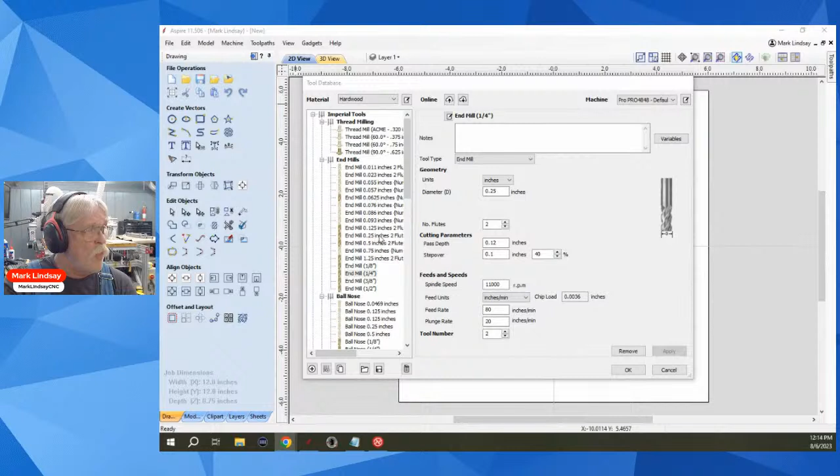Now this 1/4 inch end mill is set at tool number 2 for some reason, and I don't remember why I have this set at tool number 2. But if I come up here to this 0.25 inch 2-flute end mill, it's tool number 1. They're both 1/4 inch end mills, but the geometry is either slightly different or I have a feed rate set different, so I want to make that distinction. I want one to be able to plunge deeper than the other.

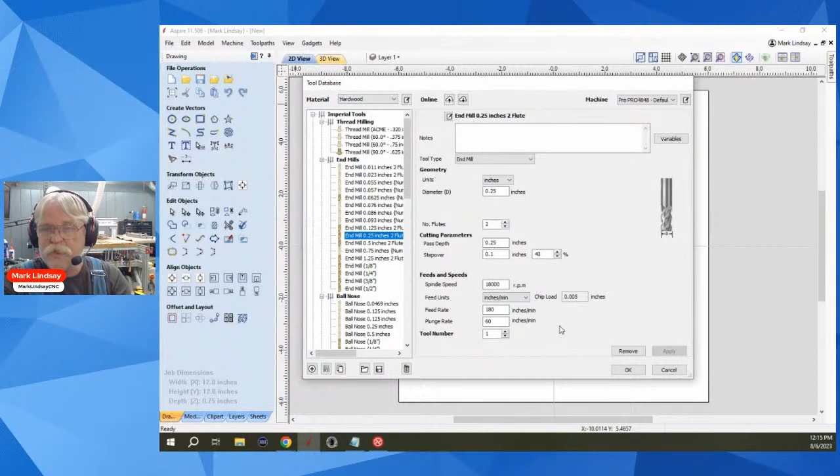So I have changed the tool number, letting me know that it's time for a tool change. I use this in situations where I want to use both a down cut and an up cut within G-Code. I will put a tool change in there on purpose.

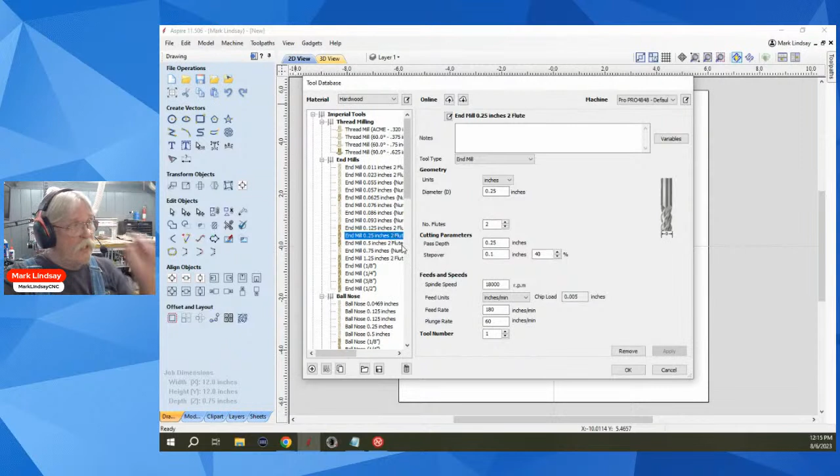Now if you look at, let's see here, I've got this 1/4" end mill that is tool number 1. I come up here to this 1/4" ball nose. No, not that one, this one. Okay, that one's tool number 6. That one works out just fine.

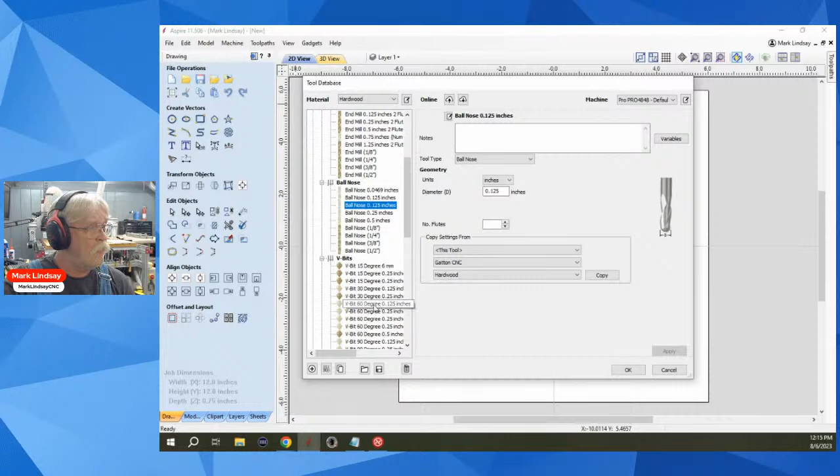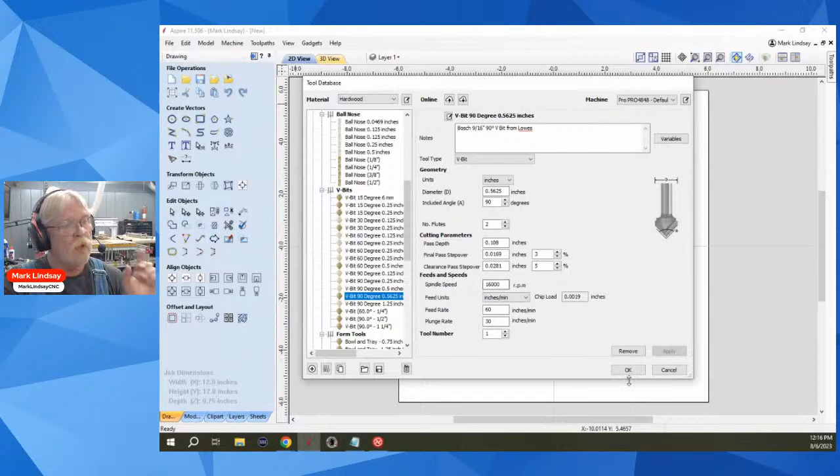Let's try my 90-degree V-bit. It is also tool number 1, but the geometry is completely different from that 1/4" end mill up here. So that's what that error message is trying to tell you. They are both listed as tool number 1, but the geometry is different, so it won't let you save the G-code. The way to fix this is, let's say you're over here and you're doing a profile toolpath, for instance.

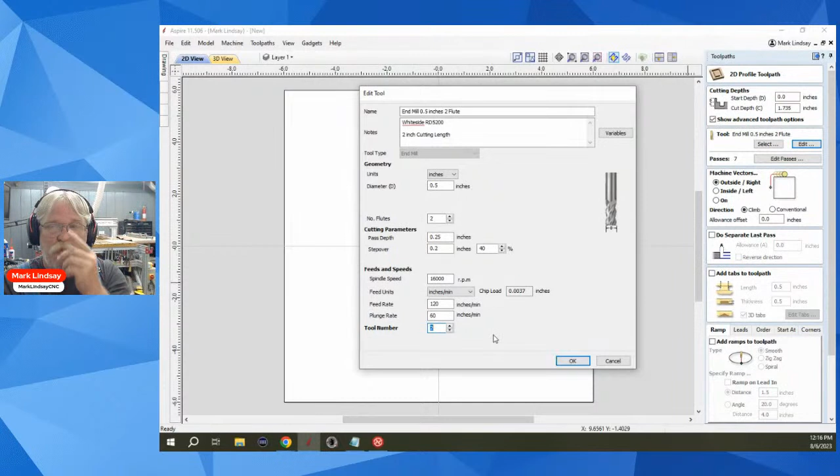I have, for instance, on this toolpath, a 1/2" end mill selected. I'll come over here to the edit function and just change the tool number right there. That will let me save the G-code, but it will also put a tool change in that G-code. Personally, I don't like to do this. What I prefer to do is...

Close this. When I go to save my tool paths, I will select all the tool paths that use the same bit and put a check mark next to them and save those visible tool paths to one file. So all of my 1/4" end mill toolpaths except profile cutout will go in one G-code file. All of my V-bit toolpaths will go in another G-code file. I always do my profile cutout last.

That way, I always do it separately, and it's the last one that I run. That way I don't make a mistake and cut out the project before I'm done doing other operations. So the last thing you want is a piece coming loose.

I was assuming Vectric could save multiple tool changes for carbide motion for Shapeoko to a single file. It can. What it's telling you is that you have 2 tools listed as tool 1.

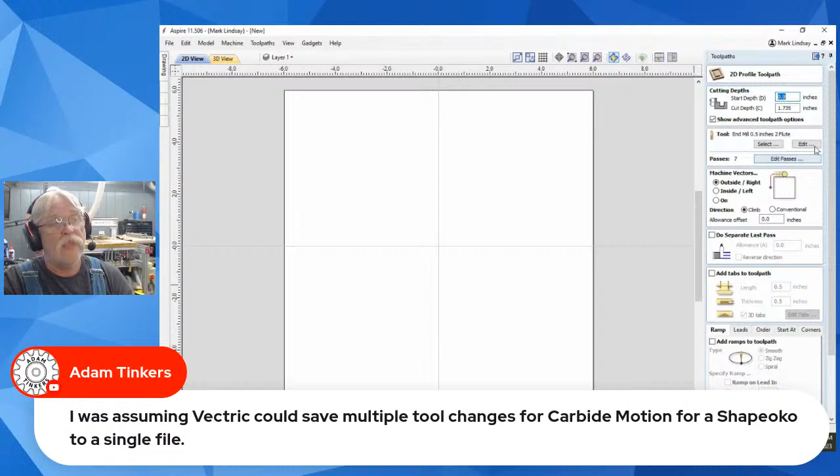So that's when you go into, let's go back here, select the tool, go into edit, and you change that tool number so that you can put all those multiple files in there. They just have to have a different tool number. They can't both be tool 1.

So if you put your end mill as tool 1 and your V-bit as tool 2 and your tapered ball nose as tool 3, it'll do as many tool changes as you want, provided your post processor can handle it. They just can't have the same tool number. That's what I'm saying.

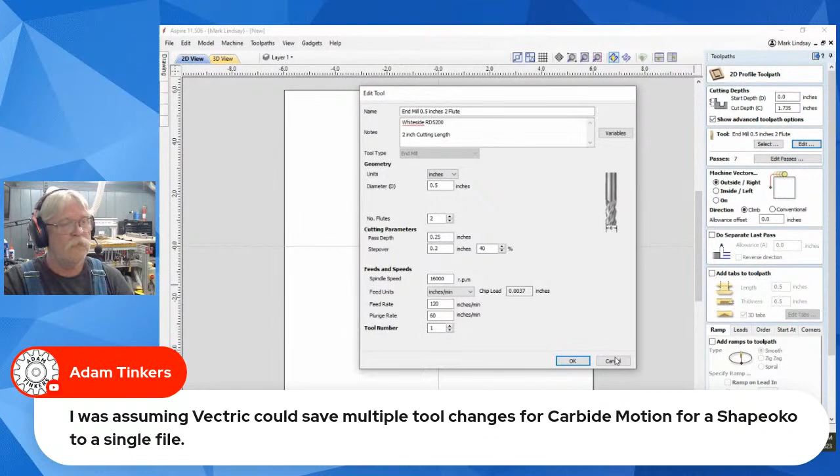So, let's see here. Get down there. Let's go back over here.

Jay Huemann says, good afternoon. I have a question about flattening a slab on my Avid CNC. I'm using V-carve. Is there a way to make the flatten bit only cut in one direction?

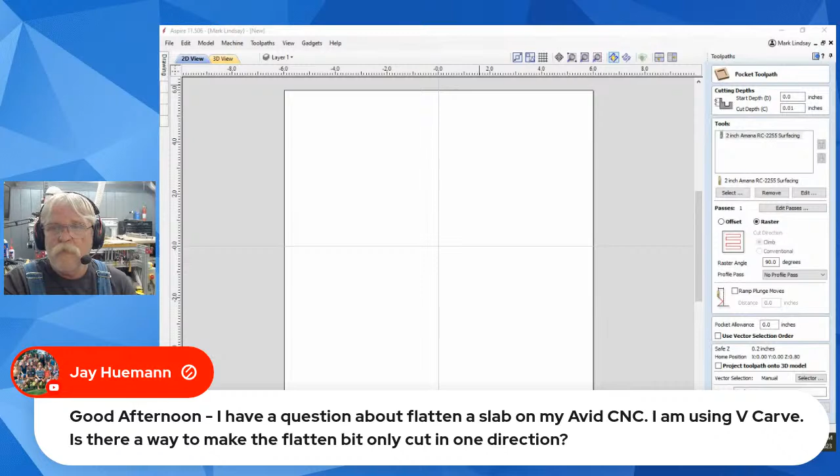Well, generally speaking, when you're flattening a slab, you're using a pocket tool path. This is what I've been doing most of the day. Well, most of the day, most of the week. Who am I kidding? Because I'm gluing up panels that are wider than my planer.

Can you get it to plane in just one direction? It would be difficult. I'm sure there's a way to do it.

But personally, what I do, let's say for the sake of argument, this is how I do my slab flattening. I have here a piece of material that's 12 inches by 12 inches. This is just an example.

What I'll do is I'll come along and draw a rectangle that's bigger than my material. And because I have my XY datum position set to the center for this demonstration, I'll want to center that over X0, Y0. I want square corners.

My surfacing bit has a 2-inch cutting diameter. So what I want to do is get that bit to come off of each edge of my material. I want to make this rectangle 1 inch wider than the material, so it comes off the edge by a 1/2 inch. I'll set my width of this rectangle and let the calculator do the math for me. I go X plus 1 equals, and it enters my X measurement.

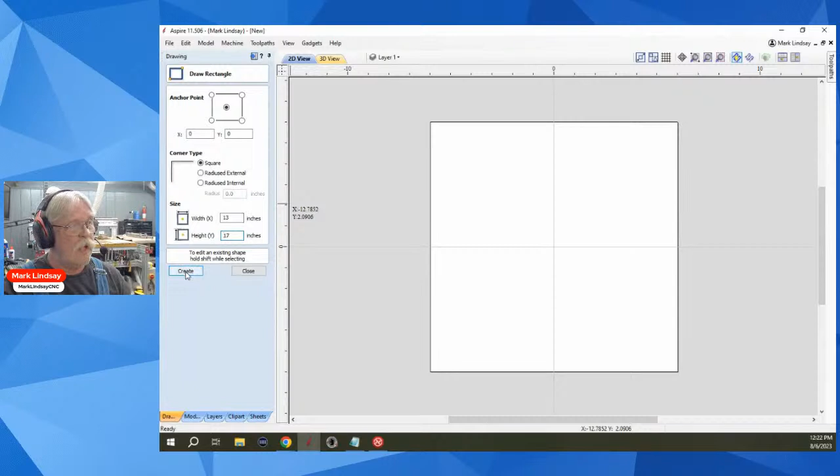I can close that, select it, and align it to the center just in case it didn't do that automatically. Now I want to create my pocket for surfacing.

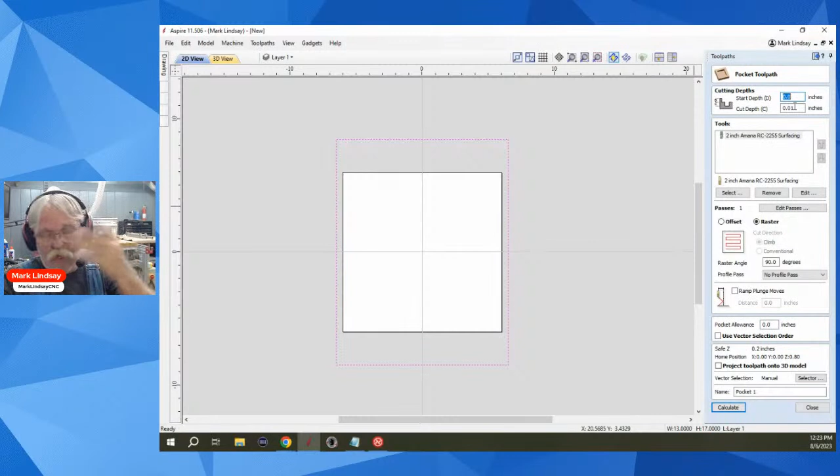I surface at 10 thousandths of an inch per pass. That's just my choice—I know how to get in and work in Mach 4 to change that. But I set up the toolpath to go 10 thousandths per pass. Using my 2-inch bit, I do a raster strategy with a raster angle of 90 degrees, which makes the bit go back and forth in Y with no profile pass.

Then that's all I need to do. I'll calculate the toolpath, and here's what I end up with. My bit's going to rapid over to the beginning of this toolpath, plunge down off of the material, come down this direction off of the material, then make that X move. So it's going to go back and forth like so. That's how I want to surface materials.

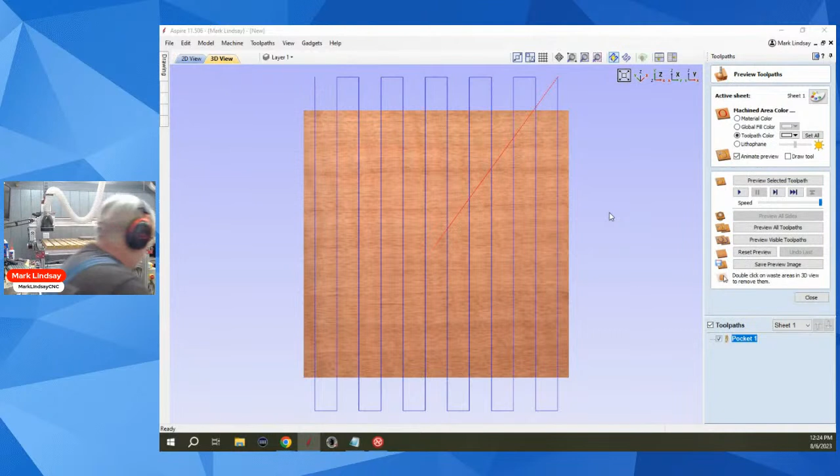Let me grab this piece real quick here. I surfaced this piece this morning, and that's the surface finish I got. I have done no sanding, no cleanup at all. That's fresh off of the machine.

I get a beautiful finish using that method. There are no machine marks, no milling marks, no tool marks at all. Now, you will notice, say right up here, a little line right there.

Imagine you're mowing your lawn. You push your lawnmower in one direction, turn around and come back the other direction, and you keep doing that the whole length of your lawn. If you look at it, you'll notice some stripes are a little different color than other stripes. That's because of the direction you were pushing that mower—the blade was still spinning the same direction, but you were pushing the mower back and forth like so.

You will get that, but about 15 seconds with some 220 grit sandpaper, and that's gone. I have no complaints about that bit. Yes, it was expensive, about $160. But when I get a finish like that and I don't have to spend 4 hours sanding it, I'll take it. So let me go put this down.

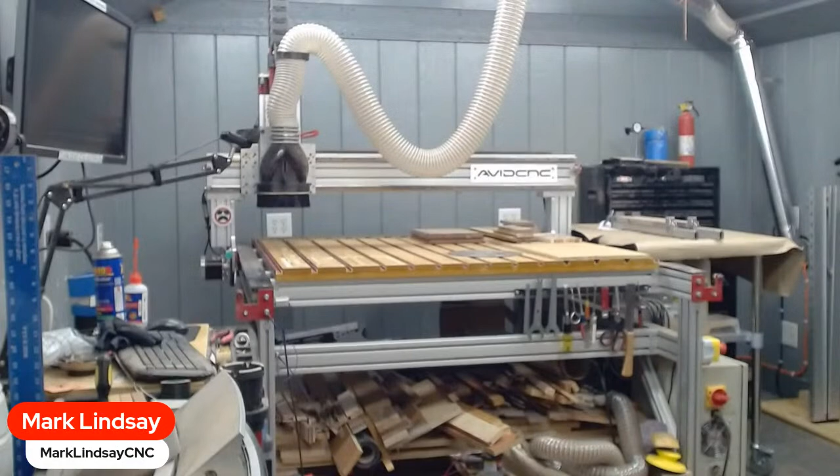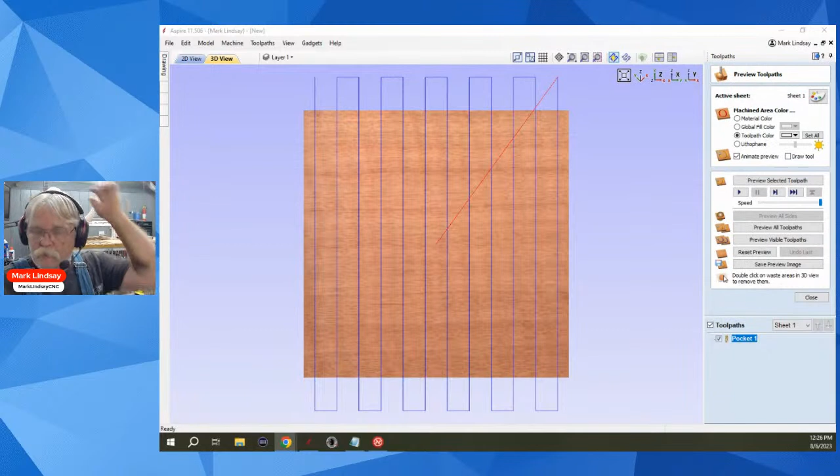I've been using that router bit, probably since February of this year. I bought it to surface that pirate multicolored epoxy inlay, and I bought it to surface that with and just absolutely fell in love with it.

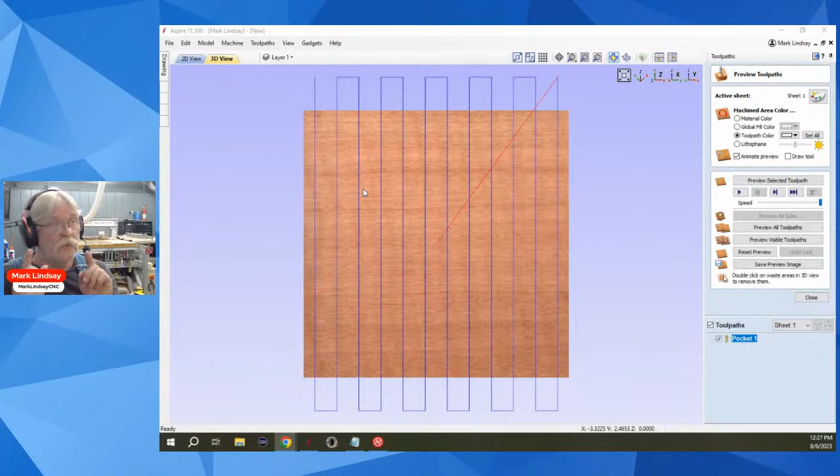I've been using the heck out of it, mainly to do things like surfacing slabs or surfacing glued up panels that are too wide to go through my planer or too small to safely be planed. Because if you've got a 4-inch by 4-inch block of wood, that's too small to go through a planer—somebody's going to get hurt. So I can stick it down on the CNC bed, and I don't even create a toolpath for that. I just do it manually.

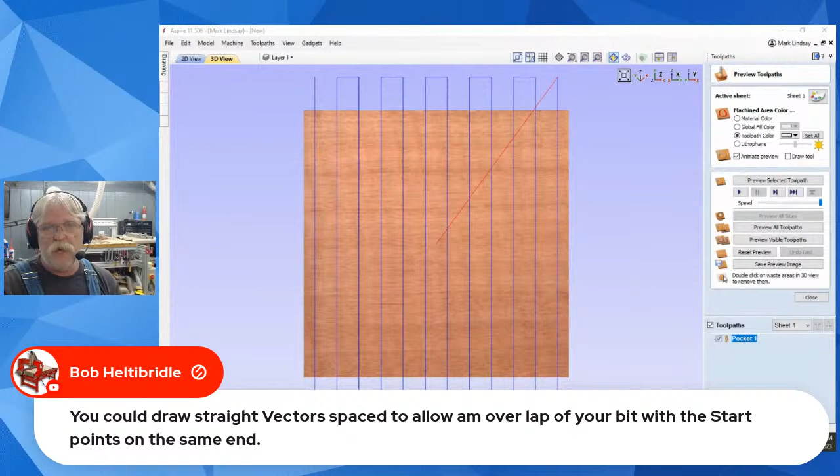Now, Bob Heltibridle came up with a great alternate here, and that is you could draw straight vectors spaced to allow an overlap of your bit with the starting points at the same end. That is an excellent point. In fact, we can explore that a little bit later.

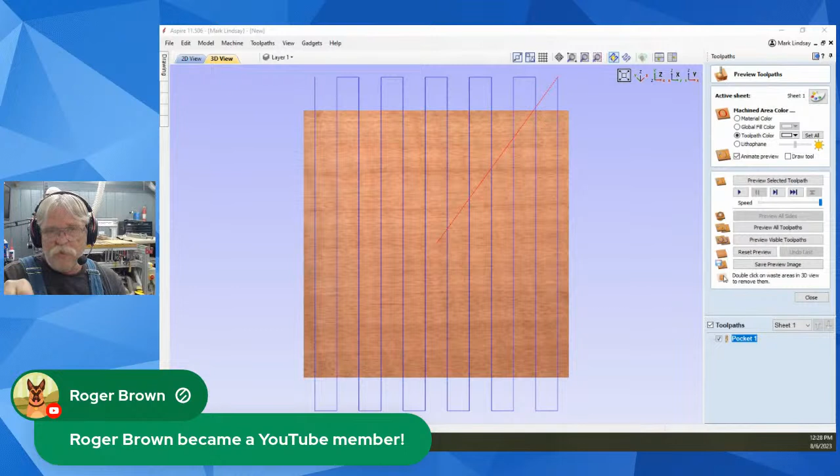Let's see here, I've got to get into other questions, then we'll come back if we have time and try Bob's suggestion with the profile toolpath. Almost hit the wrong button. Let's get in here.

Phoenician Artisan - if you're not following the Phoenician Artisan over on Instagram, number one, shame on you. Number two, do so. Get over there and check it out, doing some incredible, awesome projects. Wants to know, can you comment on flattening a long slab on a CNC using the tiling function?

Not using the tiling function. However, I've never tiled a slab flattening or any kind of panel flattening toolpath. I've not needed to yet, but it should work just like any other method. The only thing I would ask is, do you really need to use tiling? You could create two different toolpaths and just either spin around or flip, however you want to do it, your piece.

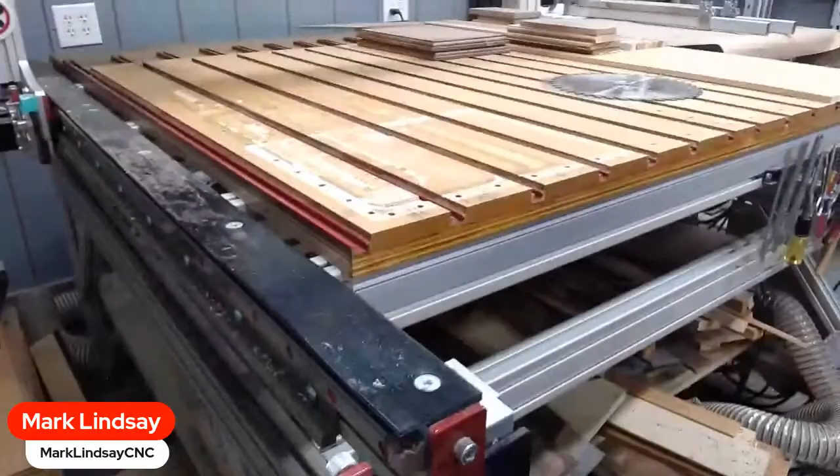I don't know, maybe you can see, maybe you can't, as I make you guys seasick. There we go. Maybe you can see this line of holes up this side, this line of holes across here. These are used for alignment and registration. I can put some pins right here, for example.

Then I'll use that walnut panel. I can grab this panel, put it right there against those pins, fasten it down. Then I have an offset. I have created a G55 offset in Mach 4. I click onto that offset, and when I click go to work XY0, that bit's going to come right here to that corner every time.

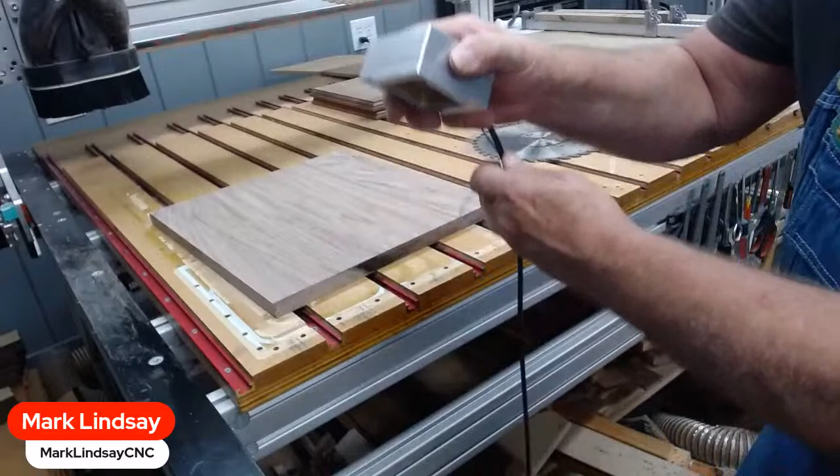Now, if I decide not to use these alignment holes, and instead I'm going to use my touch plate to set my XY0, it has this boss built in, cast into it right here, that goes right up against the corner of the material. The bit will come down in here, touch off on the Z axis, then it'll touch inside to this edge, touch inside to this edge, and it knows where this corner of the material is. So it's not up to how well I draw a cross out here to find the center of my material, or if I've got an odd shaped piece of material that is a little bit wacky.

I can put that material in this location, or I can use the touch plate to find that corner every single time. Not everybody uses that method. And if you set your XY0 to the center of your material, then beautiful. I do both. There are times I want to use the corner, and times I want to use the center of the material. Depends on what I'm doing.

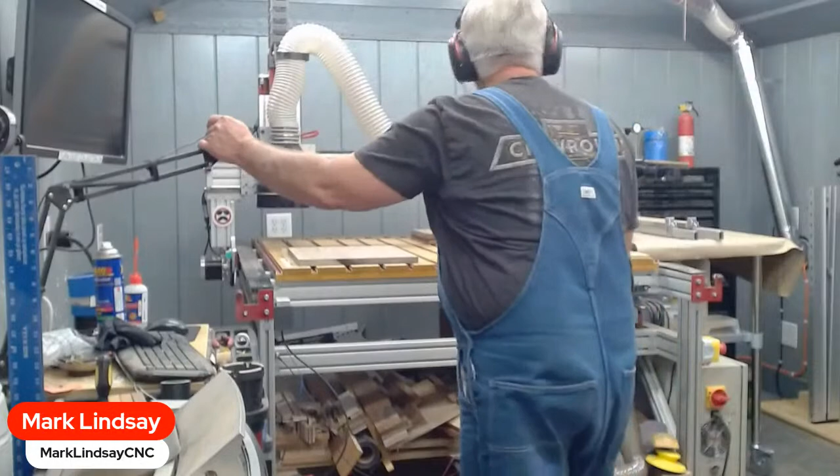For instance, I've got a project over here in the clamps. Let me set up that camera, change that over here. Bonk. I'll try not to make you guys seasick again. I've got a project over here in my clamping station. You can barely make it out.

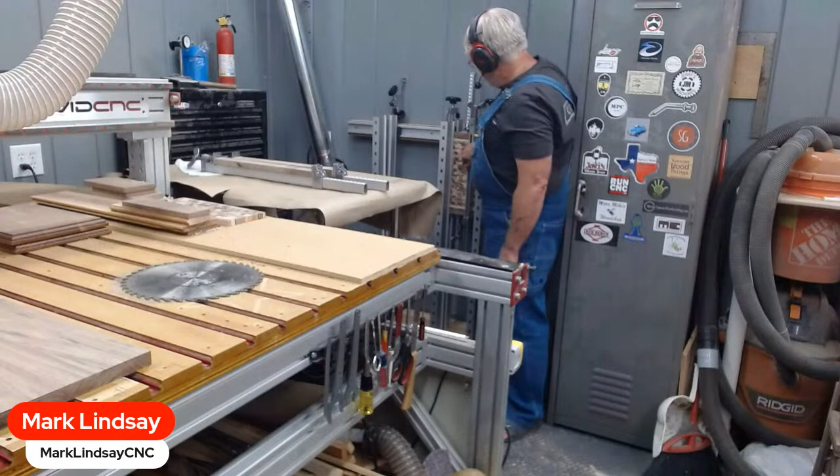It's a cutting board with a chaos pattern field, and then I've put a maple border around it, and I'm adding a walnut border to it right now as we speak. When I went to trim up one area, I had one area that was really cheesing me off, so I mounted it here on my machine. Then I drew my cross, found the center, and I centered my XY datum to the middle of that field because I wanted the thickness of that maple border around that field to be even all the way around.

And it was slightly offset to one side. I don't know if I got a setting wrong or something happened. So there are times where I do want it set to the center. So it isn't an either or proposition. You can do both, you just have to be careful and keep track of which method you're using for that project and at the time.

So, let's see here, I hope that answers that. Let's see here. We got some good questions here.

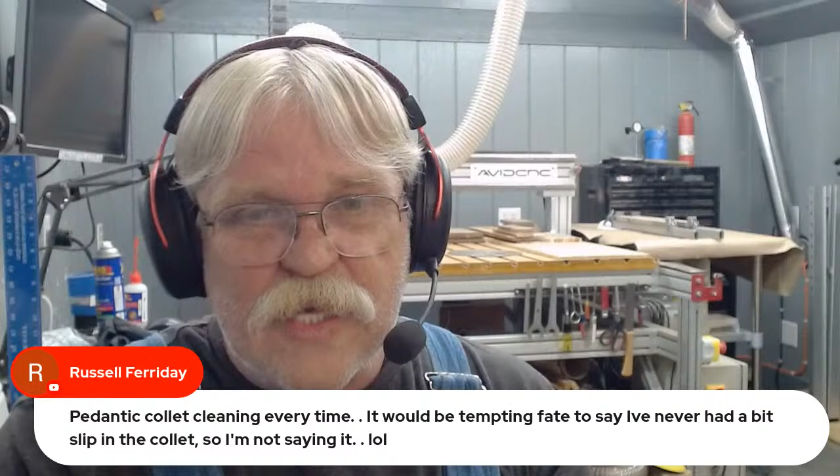It would be tempting fate to say I've never had a bit slip in a collet, so I'm not saying it. I hear you, knock on wood. You know, I have had bits slip. It's been 100% my fault, I just didn't push down on it enough, didn't tighten it down enough. But that was when I was first starting out, and I was used to a regular router, not a CNC router.

Let's see here. Steve Greer says, hey Mark, having a Mach 3 jogging issue. Router moves rapid for about an inch, then slows to the set rate. Does this on all axis every time direction is changed.

Okay, it moves at the rapid rate for about an inch, then slows to your feed rate. Are you ramping in a plunge at that point? Because if you are, it's going to slow down. If you're not, you might want to check for binding. Now, the fact that it's on all axis every time, it would be odd if all of your axes were out and it was binding on all three.

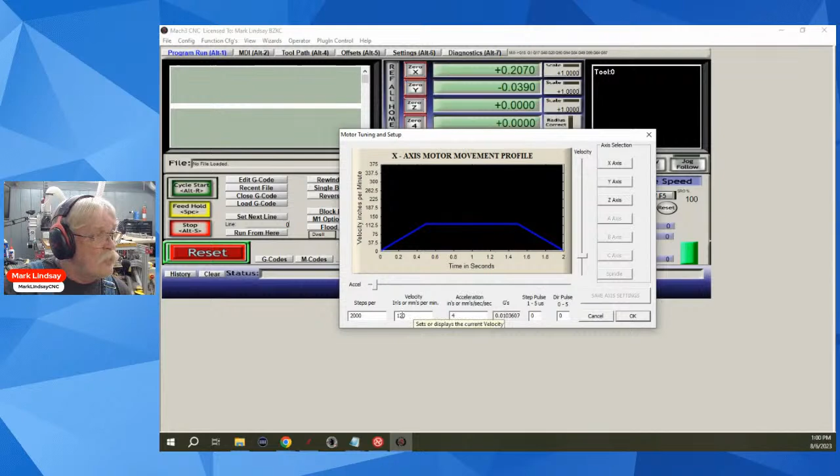So I'll hit tab to come back out of there. If I go to jog it, I don't know if it's going to let me do it or not. Yes, it will. Okay, if I jog over this way, it's going to jog at this rate. Nope, that's feed rate, that would be my rapid rate. Let me get into... it's been so long since I've used this, what is my rapid rate? My rapid rate from my x-axis is 120 inches per minute, so that is the rapid rate. Cancel. So when I use my cursor left or cursor right keys, it should be moving at 120 inches per minute.

Okay? The whole way. If that isn't happening and it's all of your axes, check for binding. You may have something too tight. I don't know what kind of machine you have. Is it belt drive? Is it lead screw driven? Is it rack and pinion? I don't know. If it's a belt drive, check the belt tensions. If your belts are too tight, that could do it. It could just be binding up.

Let's see here. Steve A.L. Peleg says, are you jogging using a continuous keyboard press, or are you jogging using a mouse or pendant? If it's a keyboard, maybe some feature like sticky keys is involved. I guess that's a possibility. It could also be crud down in the keyboard.

Let's see here. Now, I don't know if this is La Roast or LA Roast. Your thoughts on using fine tapered ball nose bits as V bits in V carve? It depends on what you're doing. Such as the Amana 46280, 46473 for detailed inlays. What's your favorite bit for fine detailed inlays? I've not yet done a fine detailed inlay. My favorite bit is a 15-degree V bit so far.